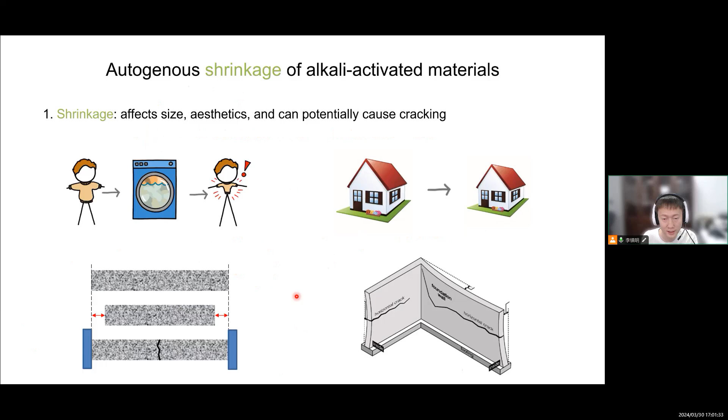Actually these reasons lie in the three keywords of this sentence. First is shrinkage. Shrinkage of concrete can affect the size apparently, it also affects the aesthetics of the structure, and it can also potentially cause cracking of concrete and of the structures. We don't want our structure or our house to become smaller, and we also don't want cracking, which can affect not only mechanical properties but also durability.

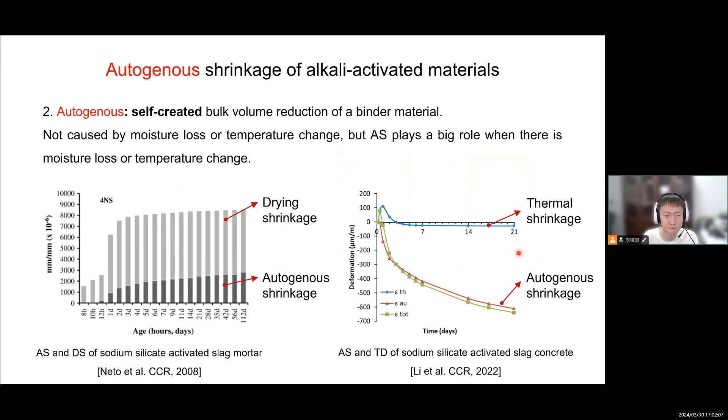Another reason why we should study this topic lies in autogenous, which kind of means a self-created shrinkage. It is not caused by moisture loss or temperature change, but autogenous shrinkage still plays a big role when there is moisture loss or temperature change, for example in drying shrinkage or thermal shrinkage. So autogenous shrinkage accounts for a big part, and that's the reason why we need to clarify this phenomenon first before we can clearly understand drying shrinkage and thermal shrinkage.

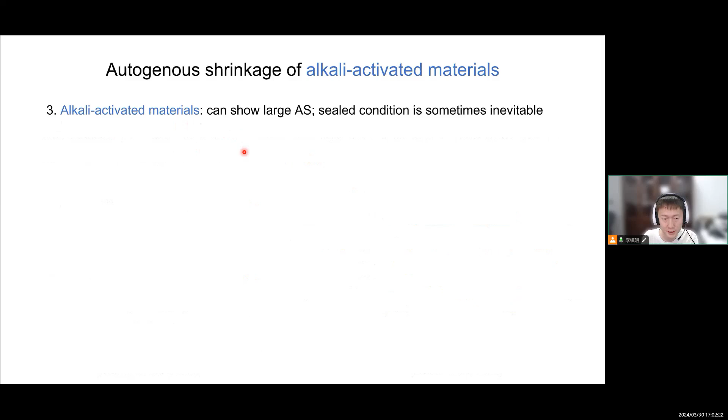The third reason is we need to concern, especially for AAMs, because these kinds of materials are special or different from Portland cement. They can show large autogenous shrinkage, for example. Metakaolin system can show low shrinkage, I will show later, but fly ash system, alkali-activated fly ash, can already show bigger autogenous shrinkage than OPC. Although the later age developing rate is not high, the total magnitude is not low. For alkali-activated slag system, the autogenous shrinkage can be much higher compared to that of Portland cement. So we need to consider this.

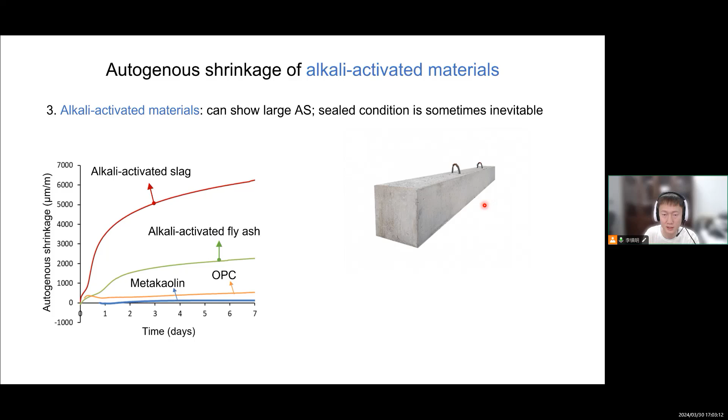It is also because the sealed condition is sometimes inevitable, for example for concrete with a certain thickness. So even though we apply some moisture or even water, for example submerged condition of the sample, the water may not readily penetrate the inside to cure or compensate the self-desiccation everywhere because the concrete is large. And also, even though we put it in submerged condition, it has its own problem.

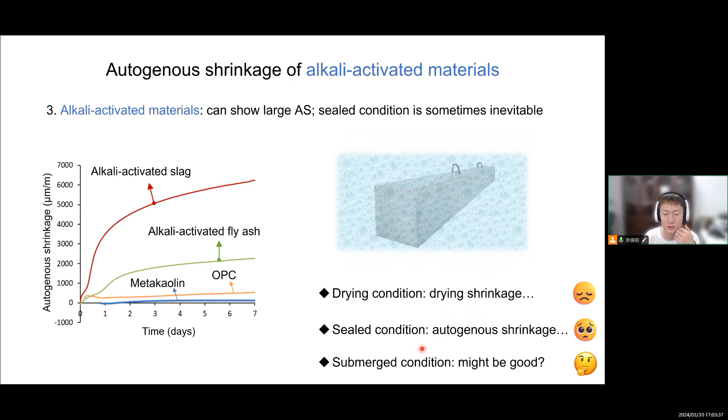So we think, okay, drying condition is not good because there's drying shrinkage. Sealed condition maybe not good because there's autogenous shrinkage again. And then how about we use the submerged condition? Actually, it has its own problem and may not be optimal.

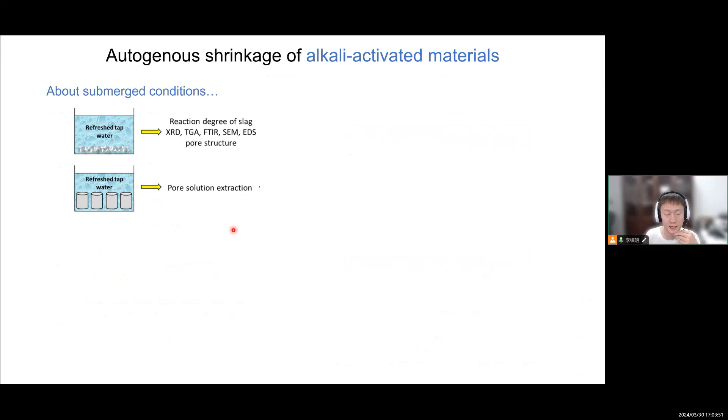For example, as we found by experiments, this kind of work is mainly done by a PhD called Liu Chen, the only PhD I'm supervising now. We found that the compressive strength will be lower if we put the samples, alkali-activated slag samples, into the submerged condition. The reason is leaching of the ions from the pore solution to the environment. So the pH of the pore solution will reduce, and the same happens for all the other elements, sodium, aluminium, silicon, which are key elements to form the reaction products.

But when the sample is in contact with water, these ions tend to leach out from the matrix, which will of course influence the reaction rate, reaction degree, and even induce the decomposition of the gel, which is really not good. We didn't show the flexural strength here, but actually I can say that it is even worse.

The flexural strength can be even lower compared to the one sealed in the sealed condition, and some cracking can even happen due to the leaching. So we cannot just say using water solves all the problems. We still have to face the autogenous shrinkage problem.

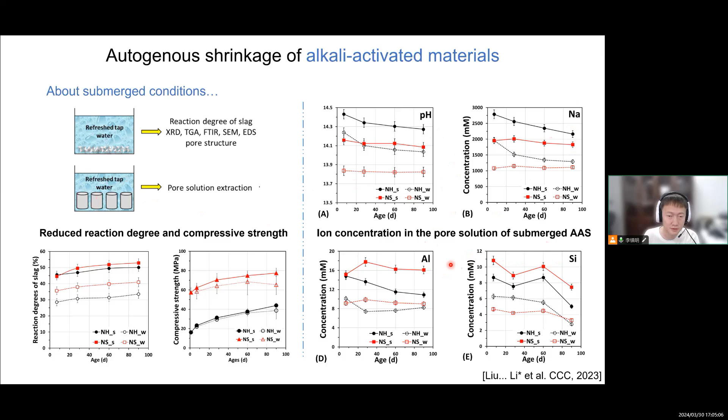Since we have to face this problem, we need to think how to study this topic. I didn't know it in the beginning, but during the past years I eventually formulated a framework to study this kind of topic. First, we need to specify the testing method - should we use the method from Portland cement, and does this method influence the magnitude we get? And when we know the magnitude, we need to explain why, which means mechanisms. Only if we know the mechanisms can we predict the shrinkage value.

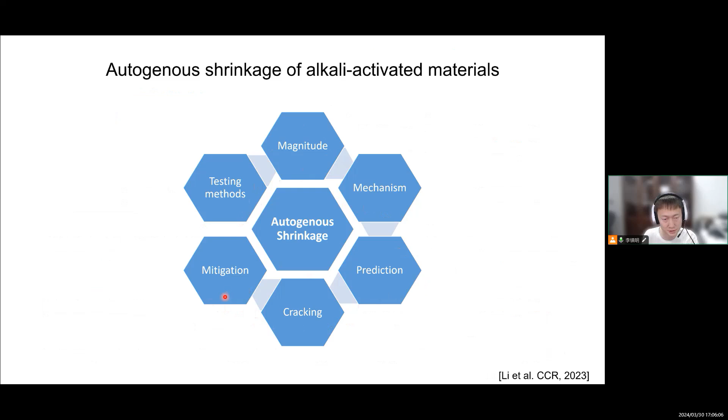Besides the free deformation, we are also concerned about the cracking potential, because we're concerned about the durability issues of the concrete, which is largely related to cracking. And if the samples or materials show large autogenous shrinkage and high cracking propensity, we need to find solutions to mitigate the shrinkage. So that is the whole framework of the research I have done.

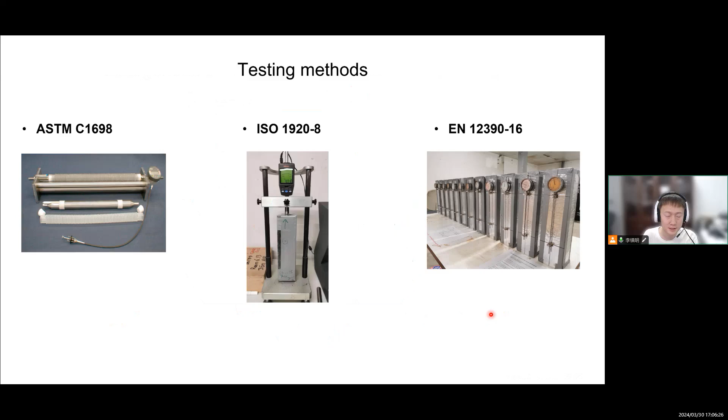So first, about the testing method - basically the methods developed for Portland cement work for alkali-activated materials, which are also kind of binder materials. Except for the alkali-activated metakaolin system, because through experiments I found there is not only chemical shrinkage, but some chemical expansion in the alkali-activated metakaolin system. That's the reason why I propose using the term chemical deformation rather than chemical shrinkage, because there is possibly expansion there. This is intrinsically different from Portland cement.

As we found in the literature, the geopolymerization or alkali activation can be divided into 3 stages, and I correlate these stages with the deformations. In the first stage, it is basically the dissolution of the precursors, and because the volume of the ions after dissolution is smaller than the volume it occupies as a solid part, there will be chemical shrinkage during this dissolution stage. During the formation of alumina-rich gels, which we can clearly see from the NMR results, there will be chemical expansion, meaning the total volume actually increases.

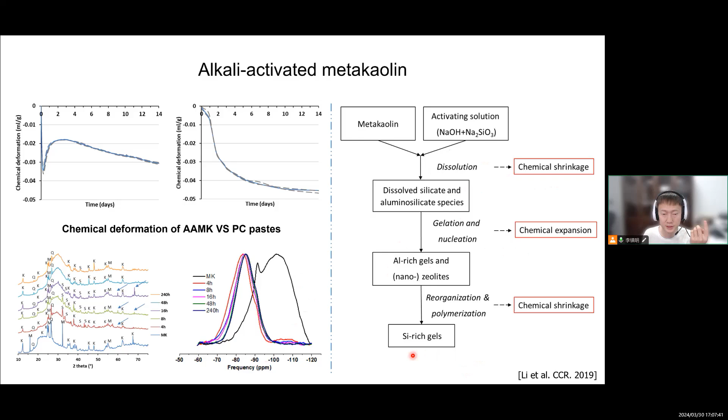This is very interesting. In the third or final stage, when silica-rich gels form, there will be chemical shrinkage again. This expansion is because the formation of crystalline or semi-crystalline phases - the solid tends to occupy a big volume, but this volume is not really available for the accommodation of water molecules. So there is a lot of water expelled from the matrix.

That's the reason why I said this kind of water may influence the measurement, because if we seal everything in a tube but the water is expelled out, maybe it can induce some expansion. But anyway, that is what we get. We can see the autogenous shrinkage curve - actually not autogenous shrinkage anymore, but shrinkage first, then expansion, then shrinkage again. So in the late and long period after the first stage, there will always be shrinkage.

So we are curious whether the shrinkage is because of the same mechanisms as Portland cement, for example self-desiccation. Is that the mechanism? So we use a saturated condition - we didn't really fill the tubes, but just filled 2/3 of the tube to leave a certain space on top. Then I use a syringe to dig a hole, and inject some solutions, for example alkali activator, on top of the surface.

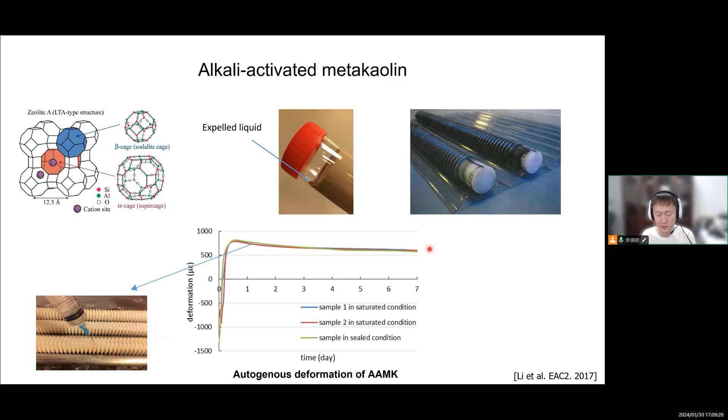I provide enough solution to surround everywhere so that it is in a totally saturated condition. But then we can see the shrinkage happens again. That means self-desiccation is not actually the mechanism behind the shrinkage. The same applies for the alkali-activated fly ash system.

So I test the autogenous shrinkage of this system, but in water, because we need normally an elevated temperature for alkali-activated fly ash - I used 40 degrees. We can see in the beginning there is chemical shrinkage, then a small expansion, or just a trend, and then shrinkage again. So it's also 3 stages of deformation, just the expansion is not that big.

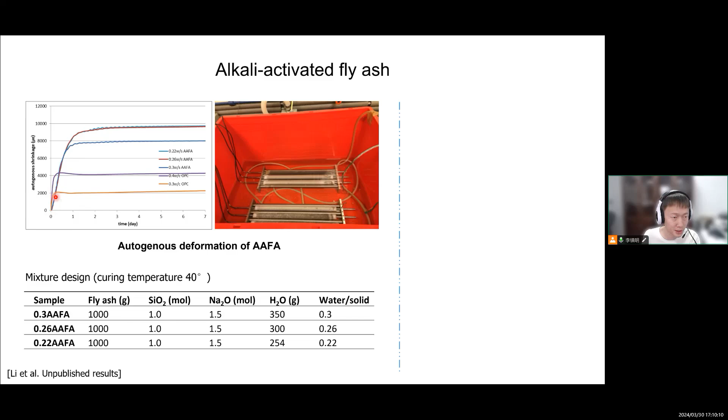People can think that the early age shrinkage - you see several thousand microstrain - can be large, and maybe think the shrinkage is a very big problem, but actually not really. This kind of autogenous or chemical shrinkage in the very beginning is closely related to the hollow voids in the fly ash. During the production of fly ash, the temperature is very high, so there will be very low air density sealed inside the fly ash particles, which are impermeable. So the air is sealed inside with low air density.

During the dissolution, the fly ash particles are dissolved and exposed, so they tend to suck solution back, and then we find chemical shrinkage. But this kind of chemical shrinkage is more a physical issue. It is not due to the reaction that consumes water, but just the water filling some volume of the hollow voids.

Using this simple method, I can experimentally measure how big the hollow voids are. It's actually very considerable, meaning that even though there is early age chemical shrinkage or autogenous shrinkage, it is not an indication of self-desiccation or consumption of water. So we need to focus on later age. The reason the expansion part is not so apparent, just a little bit of trend, is also related to the voids, because they provide space for the formation of reaction products. So the products form there, which means they will not cause expansion of the whole system.

If I'm allowed to say a bit more about this, I'm also thinking that this kind of hollow spheres can be used for internal curing. For example, if we pre-store some liquid inside, then later, during the dissolution and after exposure, the liquid can join the reaction and compensate the self-desiccation.

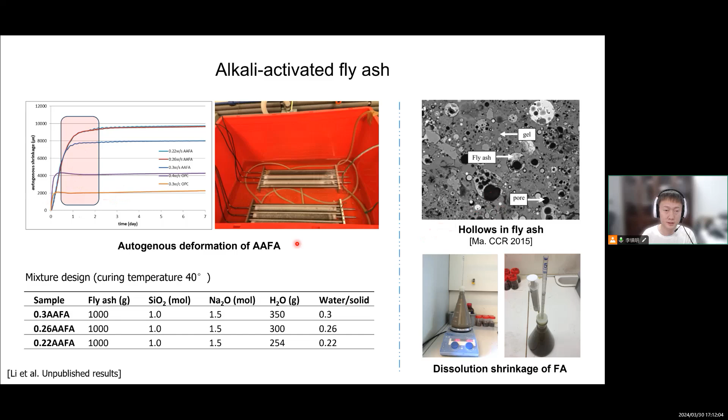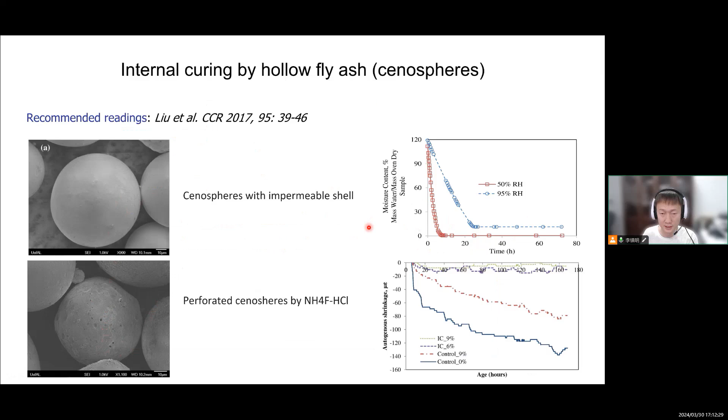But then I found someone already studied this, for example, by Liu. He used some acid to pre-dissolve the fly ash. You can see some holes there, and then some solution is sucked inside, and then after mixing, in the hardened paste, this kind of sphere has the potential to provide internal curing. Because this expert has already studied this, I didn't go into detail, so just recommended readings here.

So anyway, I want to say that even though there is chemical shrinkage of alkali-activated fly ash, and also for alkali-activated metakaolin, the relative humidity inside the system didn't really decrease. It actually even increased because of the consumption of ions. As we know, the relative humidity of salt solution is lower than water, so when the ions are consumed, the relative humidity can increase. And because there is no self-desiccation, the relative humidity can be even closer to 100%.

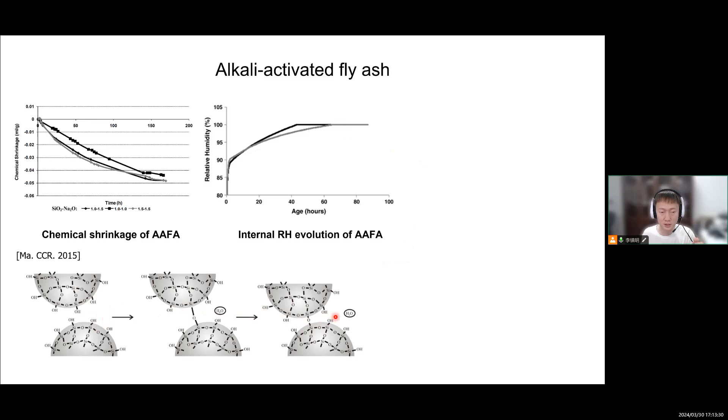So which means the shrinkage is not caused by the same mechanism as in Portland cement. Then what is the mechanism? We hypothesize maybe it's due to syneresis. Syneresis means the water hydrolyzed first and is used by the reaction, but then during or after the polymerization, the water returns to water molecules, which means the water is not really consumed by the reactions. So the self-desiccation shrinkage may not really exist in low calcium AAMs.

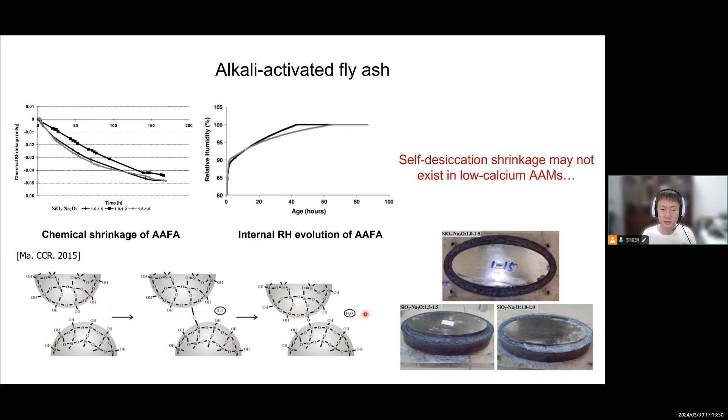Consider this, and also the low cracking potential caused by a sealed condition - this is experimental work done by Dr. Yufei Ma. Because of this, I didn't really go further, because I think autogenous shrinkage is not really a big problem for these low calcium AAMs.

Then I spent more time on alkali-activated slag. The testing methods are basically fine, and then I went to the magnitude part. We can see that there are a lot of parameters that influence the magnitude of autogenous shrinkage of AAS. Basically, if we use a lot of alkalis, there will be higher autogenous shrinkage.

But for the modulus, it's not the higher the larger shrinkage, but somewhere around 1.5. If we use a modulus of activator, which means silicate to sodium ratio, of 1.0, the autogenous shrinkage is the largest. And for the water to binder ratio, the trend is the same as for Portland cement - if we use a lower water to cement ratio, there will be larger shrinkage because there will be less water available and also a very dense pore structure.

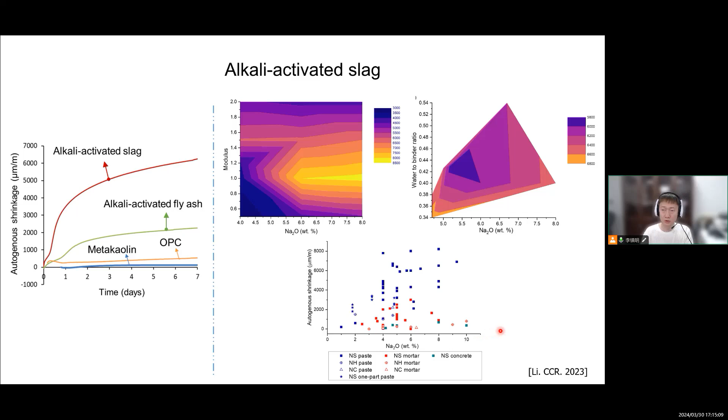Another parameter is the presence of aggregates. Compared to paste, mortar and concrete will show lower autogenous shrinkage. People will think that, of course, there will be aggregates, so you have less material to shrink, and of course the shrinkage will become smaller, but I want to emphasize that actually that is not true. The reason for the lower shrinkage of concrete is not just a dilution effect.

For example, if we consider two systems - one is the pure paste, the other is paste but with a part of the paste taken out instead, as hollows - we can see that there will be less paste there, but the shrinkage of these two systems is actually similar, if we do not consider the local geometry. So the reason aggregate can restrain the shrinkage is because aggregate is stiffer than cement, and it doesn't shrink itself, so it can restrain the shrinkage. It's not just because there is less cement or less paste to shrink.

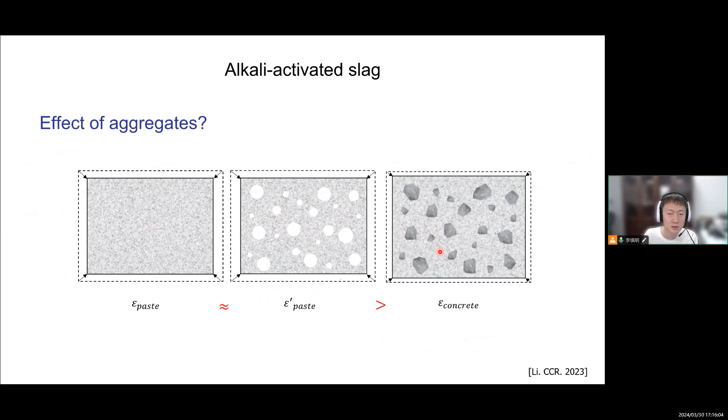And then we explored the mechanism of the large shrinkage of AAS or slag and fly ash blended systems. The first thing is the same as Portland cement, which is self-desiccation. We measured the internal relative humidity, which actually decreased a lot. Why it decreased so much is because the pore structure is normally denser than Portland cement—you can nearly see no capillary pores here, very dense.

As we know, if we put tubes in water, the thinner the tube, the higher the water level will go, which means a higher capillary pressure. So the capillary pressure is higher.

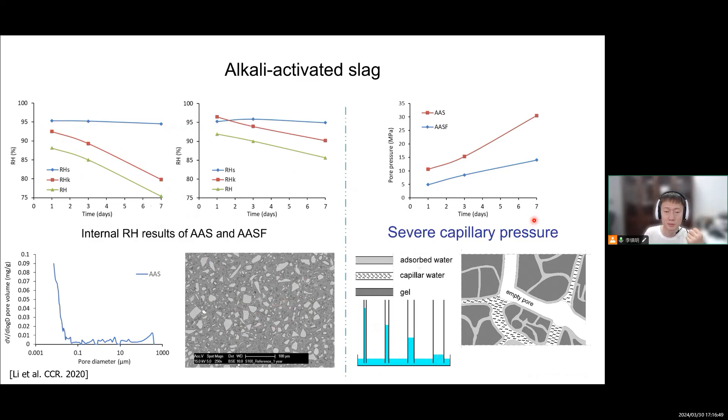But besides this, there are other mechanisms. If we put Portland cement in saturated condition, there will be expansion because of the formation of ettringite, meaning the only reason for shrinkage of Portland cement is capillary pressure. But if we put AAS in saturated condition, there will still be a large part of shrinkage, especially at early age, which means self-desiccation is not the only mechanism here.

We then correlate the autogenous shrinkage at very early age with the heat flow, which indicates the reaction rate, and we can see they correspond very well. During the dormant period, there is a small autogenous shrinkage developing; during the acceleration period, the shrinkage increases very fast; and during deceleration, the rate becomes more stable.

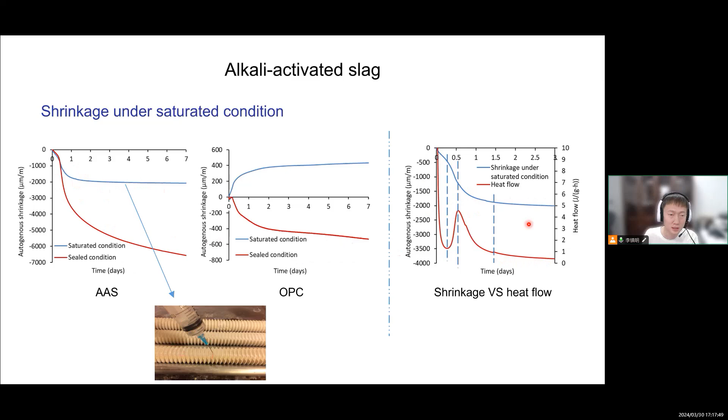So we hypothesize the reason is not just the reaction rate, but the consumption of ions. According to the study by Yibing Zuo, we can see the ion concentration from the beginning till the first day decreased really a lot because the reaction consumes ions.

In very fine pore structures, these ions exist surrounded by water shells, which means that if there are a lot of ions, they will have a repulsive steric hydration force with each other, balancing compressive stresses like van der Waals force or capillary pressure, which tend to make the gel shrink. This repulsive force is in balance with those.

But during the reactions, these ions are largely consumed, meaning there will be less hydration shells, so the steric hydration force becomes smaller. The repulsive force becomes smaller, but the compressive or attractive force is still there, so the gel actually becomes closer together.

That is my hypothesis, but I didn't really get molecular level evidence yet. It's just a hypothesis.

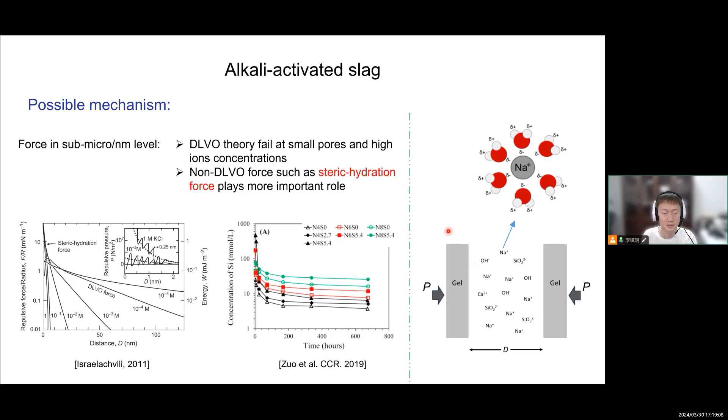So in summary, what are the mechanisms of autogenous shrinkage of AAS? First is the big capillary pressure caused by self-desiccation. Second is the reduction of steric hydration force due to the consumption of ions. The third reason is the low elastic modulus.

Alkali-activated slag or slag-fly ash blended systems are not as hard or stiff compared to Portland cement—the elastic modulus is normally lower. Another reason is they show very pronounced deformability, which is time-dependent behavior we call creep.

So when there is a constant pressure, even if the capillary pressure doesn't increase anymore with time, the constant pressure can still cause the gel to shrink because of creep. These effects are actually even larger than what we observe in Portland cement.

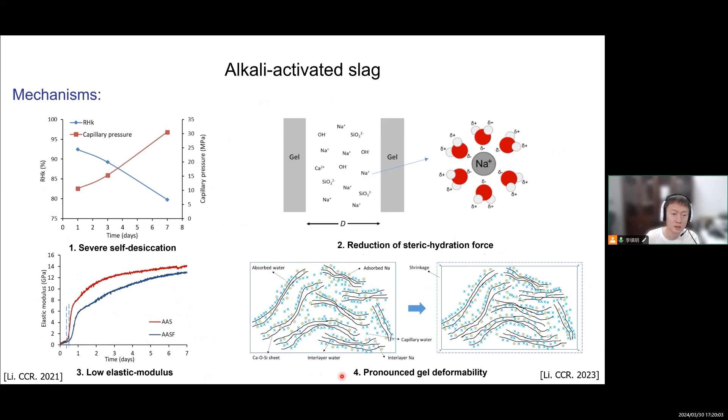So here I would like to propose something. When we look at shrinkage mechanisms, we should not focus on the terms or names of the materials. For example, fly ash and slag are both byproducts, but they have totally different shrinkage mechanisms because they have different chemical composition—one is silica rich, one is not.

One is calcium rich and one is not. We also call these geopolymers or alkali-activated materials, but actually the names aren't so important. For example, in Portland cement, the pozzolanic reaction is caused by CH, which is also alkali—so why isn't that alkali activation? Actually, the name doesn't matter.

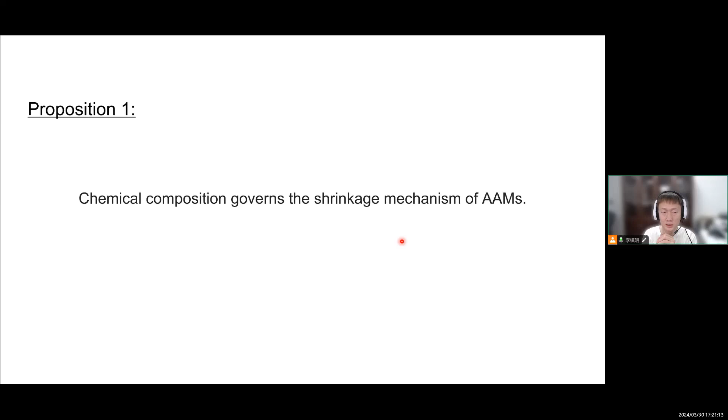Actually, AAS is more similar to Portland cement than to fly ash or metakaolin systems. Fly ash is a waste, but metakaolin is a resource, yet these two systems are more similar to each other, while AAS and Portland cement are more similar. So we should look at the chemical composition—that is what I want to say here.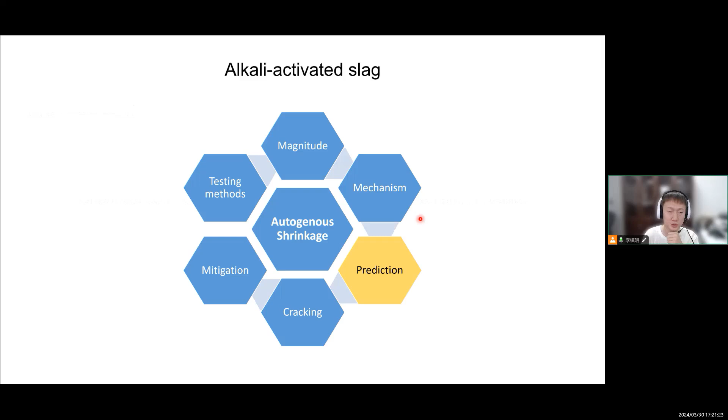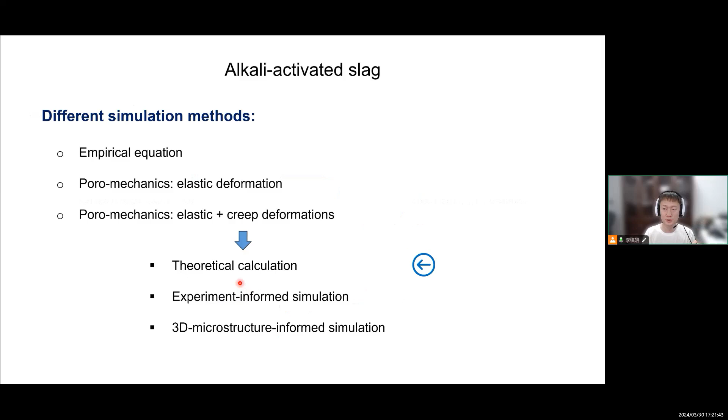Since we know the mechanisms already, we should be able to predict the shrinkage. There are a lot of types of models available, but because we do not have a 3D microstructure-informed model to predict shrinkage of alkali-activated materials yet, I used a method that is half theoretical and half experimental, with even some empirical parameters.

So I divided the shrinkage into two parts. As we found, part of the shrinkage is caused by the pore pressure or capillary pressure, but another part is the steric hydration force part.

So I divided it into two parts. For the capillary part, there is an elastic shrinkage and also time-dependent shrinkage, which we call creep. For the elastic part, it's simple - we just use Hooke's law and calculate or measure the different parameters.

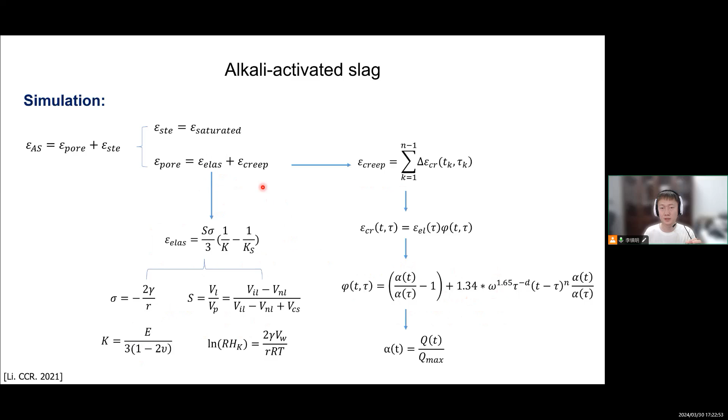But for the creep part, we need to use some equations involving reaction degree, water to cement ratio or liquid to cement ratio, which are omega parameters. There are some empirical numbers like 1.34, 1.65, etc. These are from a paper written by Professor Klaas van Breugel, who is my PhD supervisor, and we discussed this together. I used his model to predict the creep of the alkali-activated slag because I think if they are physically similar, then this model should work.

So this is the simulation results. We can see that indeed it matches really well with the experimental data. There are three parts: steric hydration force, elastic part, and creep part - actually a very big creep part. This means our understanding of the mechanism should be right.

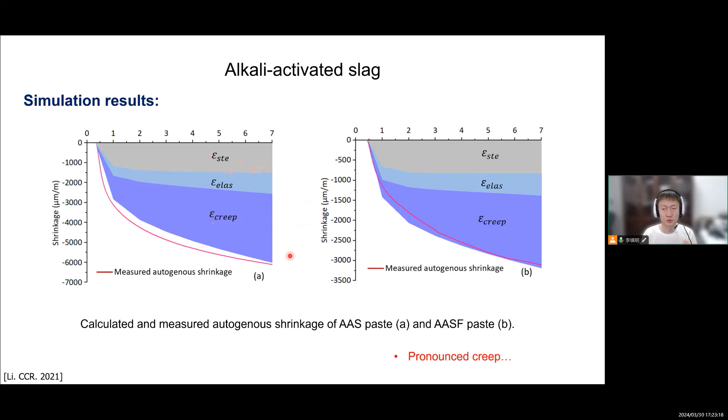So as a famous professor said, all models are wrong. Actually these models are also not right. People can think, okay, you already said that AAS have different mechanisms from Portland cement, then why do you use the same parameters? Why is it 1.34, not 1.35 or something?

So first, I didn't use the model to predict the whole shrinkage. I divided it into several parts, and I only used it to predict the creep. Second, I used the same model and didn't propose new numbers, because if I propose totally new equations and numbers, I will surely be suspected of making up things just to fit the experimental data. Then it will lose the whole meaning of our work.

So all models are wrong, but some are useful. This model we used is useful because it tells us that creep is a very important part of the autogenous shrinkage for the AAS system. Since we know this, we should be able to use this model to predict the shrinkage of alkali slag concrete.

So for the prediction of shrinkage of concrete, there are already several models available, for example the fib Model Code. In the standard, we can use the model to predict shrinkage from strength data, but this model doesn't work for AAS because for similar strength level, AAS shows higher autogenous shrinkage. So this kind of equation doesn't work for this material - it will really underestimate it.

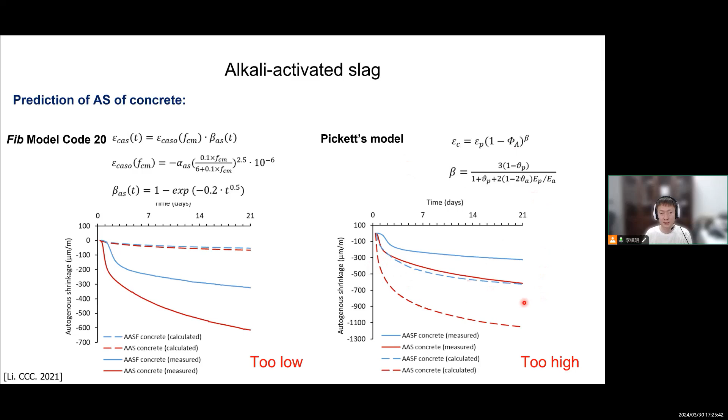So we consider this creep part in the equations, and we integrate the creep part into the equations. We calculate the force between aggregates and the paste. But there is, of course, a limitation - we assume the paste is very large and the aggregates do not really interfere with each other. But we agree that in reality, the distance between aggregates is actually not that large - it's actually small, so aggregates will influence each other.

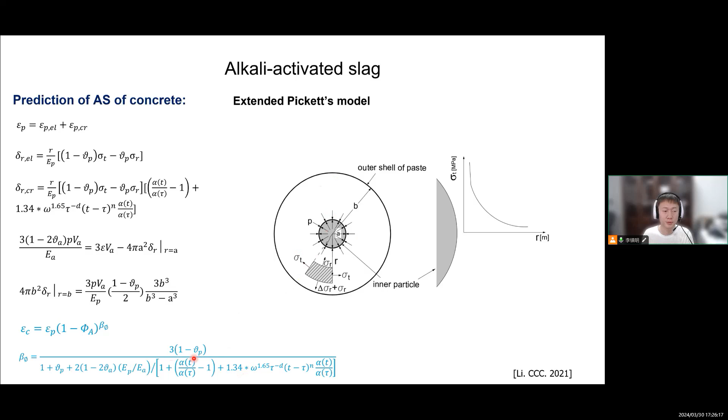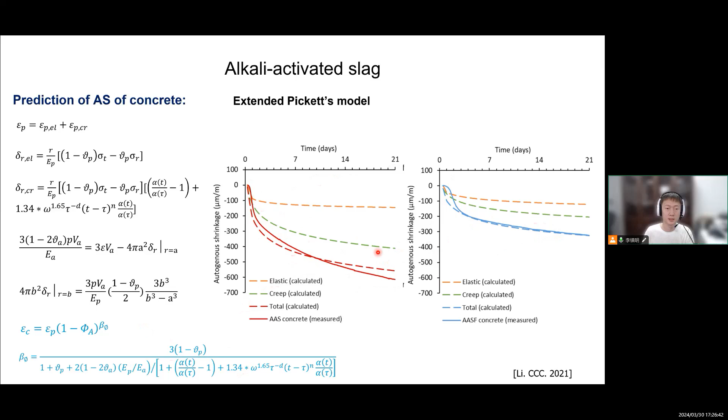So this is just the initial model. We assume the paste is very large, then we integrate the creep part into the model, and calculate the shrinkage of concrete based on the shrinkage of paste. But the result is actually very nice, except for the very early age when the reaction is very fast and very complicated - we cannot really predict everything. But after the first days, they really match well with each other, showing that the methodology we used should be reasonable, should be fine.

And since we can predict the free shrinkage, we are also curious about cracking when the samples or the material is in a restrained condition. For example, there is old concrete, there are adjacent structures - nothing in our house is actually free, everything is connected with each other. So there can be tensile stress and cracking potential, so we need to study that.

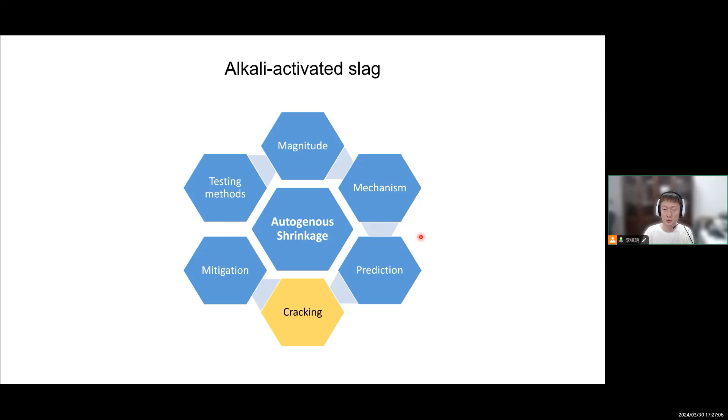I studied the concrete for cracking potential using this TSTM and also ring test to restrain the concrete, and then observe the cracking at the macro scale and also the micro scale. Basically, the methodology is: we know the free shrinkage and then we know the elastic modulus.

We should be able to calculate the tensile stress, but of course we consider the relaxation. So when we have tensile stress, we compare it with tensile strength, we can predict the cracking potential. That is the whole methodology.

We compared the cracking time of alkali-activated concrete with CEM I, CEM III/A, CEM III/B, which means it incorporates a large volume of fly ash or slag. The cracking time is not necessarily earlier. Actually, the cracking happened later, thanks to the relaxation.

So although the tensile strength for alkali-activated concrete is lower. For Portland cement concrete, we know that it's around 0.1, so when you have a compressive strength of 10 megapascal, the tensile strength should be around 1. But for alkali-activated concrete, it's lower, 0.05. So it is not so good for the cracking because the tensile strength is lower.

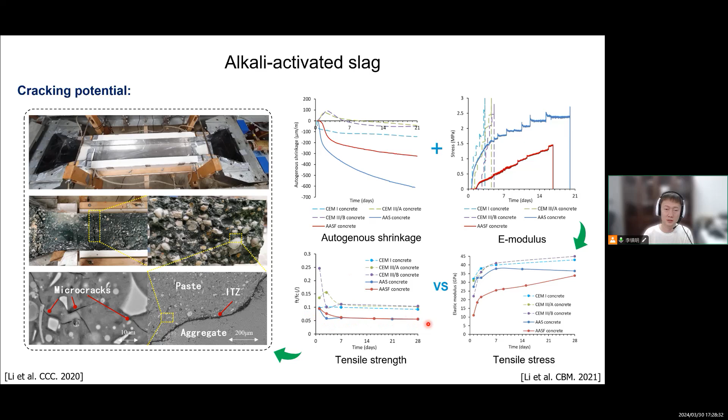But thanks to the relaxation, the cracking time is not so early. The relaxation, we simulated it from the creep coefficient, so we based on the creep coefficient to calculate the relaxation coefficient. And we consider the shrinkage into two parts, elastic and creep, as we said. And then we consider the relaxation. Eventually the prediction is not that bad - we can more or less simulate the stress evolution in restrained concrete.

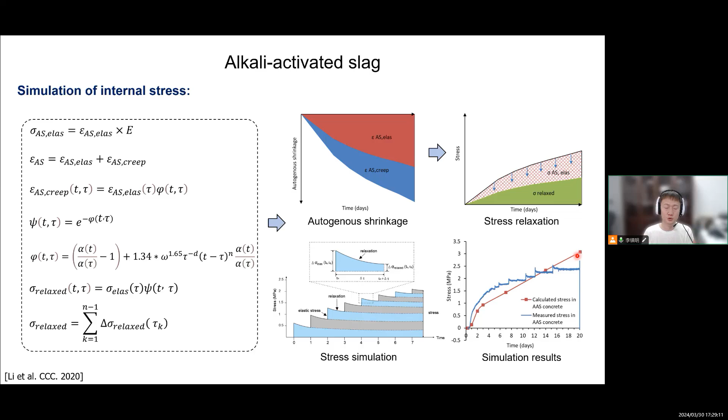And if we know the flexural or tensile strength, we can compare stress with strength, then we should be able to roughly predict the cracking time, which is really useful for structural analysis.

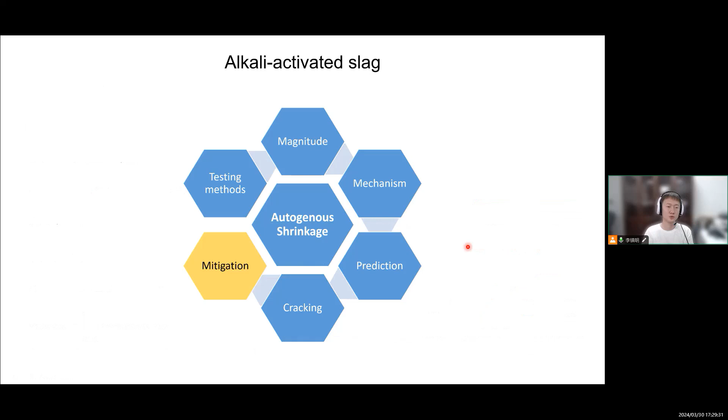Since we know that there is a large shrinkage and also the cracking still occurred, although it is not so early, in 2 or 3 days, it still occurred within 3 weeks, which also means very high cracking proneness. Then we need to find some solutions to mitigate the shrinkage and the cracking proneness, of course.

There are different ways to mitigate the shrinkage, but I want to say that all the methods must have their own mechanism. So we need to see which method changes which parameter - it's related to the elastic modulus to make it stronger, or related to a lower capillary pressure, or lower saturation degree, or a coarsened pore structure, which means a larger pore size, or something else. So anything must have its own mechanism.

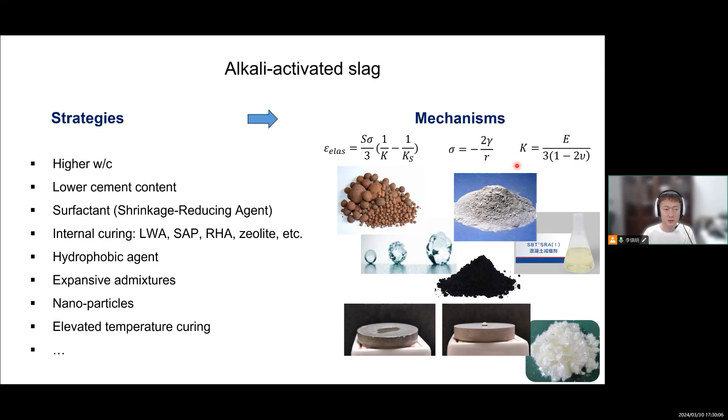So I basically considered 2 methods. One is internal curing by superabsorbent polymers, which are actually not new - they've already been used in Portland cement for a long time, so I just used it. I didn't propose it, but we can see that it worked.

It reduced the shrinkage by more than half, basically in the later age. In the early age, the SAP cannot really eliminate the shrinkage, which is quite reasonable because we already said self-desiccation is not the only mechanism. So however big amount of SAP I use, even more than needed, the shrinkage is still there, especially in the early age. So we cannot fully mitigate the shrinkage, but it worked really well in the later age.

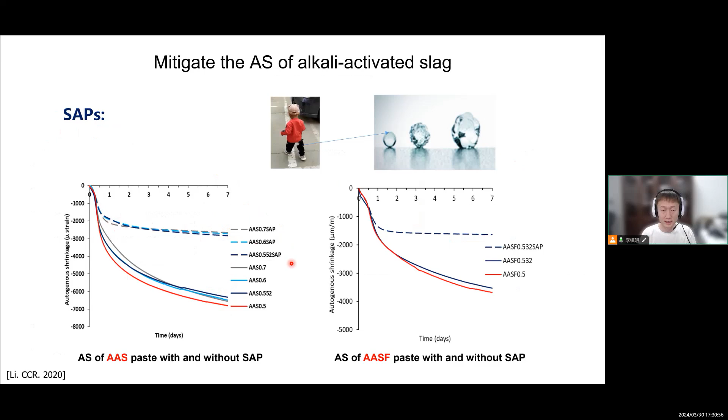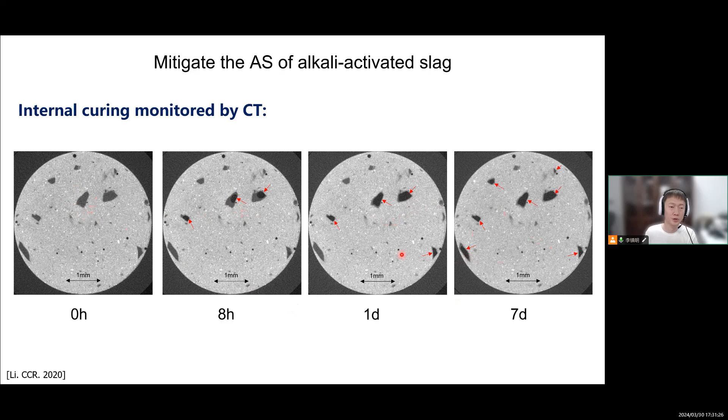Another way we tried to monitor this internal curing is by CT scan. We can see in the beginning it is kind of gray, which indicates the liquid in the SAP, and then it tends to become black because the water, all the liquid, is released, and then there are air bubbles. With the elapse of time, more black areas appear inside, which clearly shows how the liquid is going from inside the SAP to outside.

Another way to mitigate the shrinkage is by adding metakaolin. So my initial idea is: alkali-activated metakaolin can show chemical expansion, and alkali-activated slag can show large shrinkage, and AAMK can release water, expel water, and AAS needs water. Then maybe the water can compensate each other, can internally cure each other.

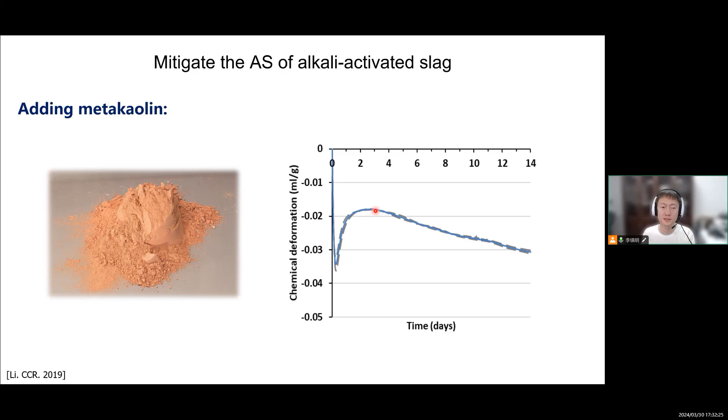That is my initial idea, but then this idea failed, because from the chemical point of view, when you mix metakaolin together with slag, they will not be 2 separate systems anymore. They are actually a blended, mixed system, and the reaction products will not be N-A-S-H gel here and C-A-S-H gel there, internally curing each other - they actually become a blended gel, and it will not have 2 separate systems anymore. But the results are not bad.

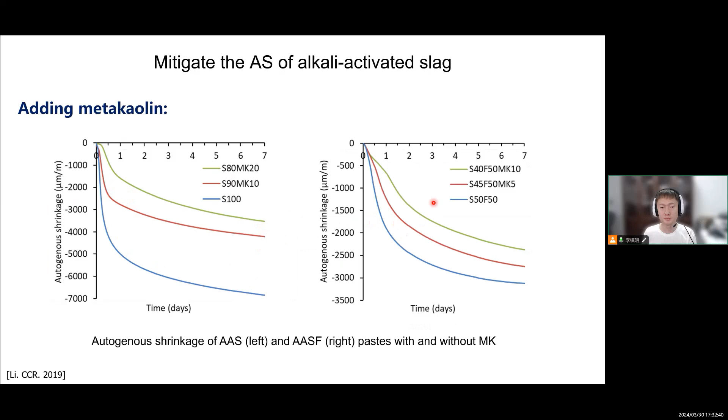So that idea didn't pan out, but the shrinkage is still reduced a lot, especially in the very early age. You can see from the blue to the green it's reduced more than half in the very early age. But the reason is not what I thought, the internal curing - no, it is because of something else.

So through a lot of characterization methods, we clarified the mechanism. Actually, it is because the addition of metakaolin provides a lot of additional silicate and alumina, which influences the reaction products, reaction rate, pore solution, and pore structure.

So for example, the reaction rate is reduced a lot. Actually, this phenomenon is very similar to a higher modulus of activator. If you use more silicate in your activator, you will find a similar phenomenon. So the reaction rate is reduced, and the pore structure is coarsened, meaning lower capillary pressure when you have metakaolin. And from the pore solution analysis, we can see there is indeed more silicate and more alumina there.

And the early age chemical shrinkage is actually increased because the metakaolin is very reactive itself, so it dissolves even faster than the slag. It contributes to a large initial chemical shrinkage due to the dissolution. But at later age, because of the reduced reaction rate, the total chemical shrinkage becomes lower, meaning less water consumption and less self-desiccation. But the strength is still similar, which is good news, because it can reduce the shrinkage but maintain the strength.

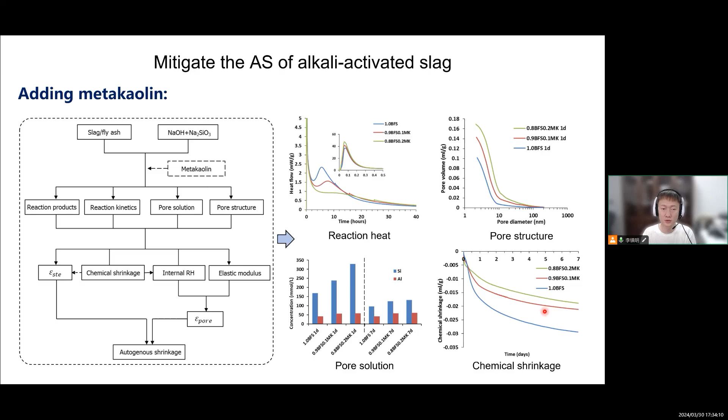Although the mechanism is not what I thought in the beginning, it still worked. So I thought, okay, internal curing can be very effective for the later age shrinkage, and metakaolin is really useful for the early age. If I combine these two, the ICM, meaning internal curing and metakaolin, maybe it can reduce the shrinkage in the whole period. Actually, that comes true.

So we can see that compared with the reference concrete, if we combine internal curing and metakaolin, the shrinkage is reduced more than 80% over the whole period. And then the cracking potential is also reduced a lot. If we do not apply this method, it cracks within 3 weeks, as we already mentioned. But if we apply this tool, the cracking didn't happen within 3 months. The stress is lower than 0.5, so it will never crack, I think.

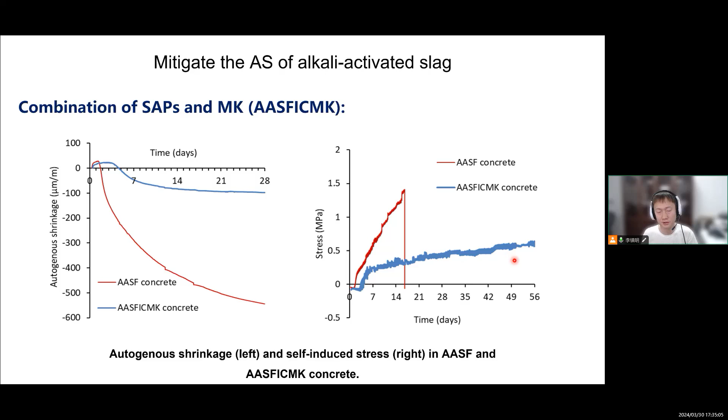So it's really helpful. The concrete strength is lower, of course, because you have SAP and metakaolin which influence the reaction, but the strength is not that low. It's still more than 50 megapascal, which is already sufficient for a lot of applications. The splitting strength is also not low, 3 megapascal. And the workability is also very good. So we think these strategies are very promising to be used in concrete structures.

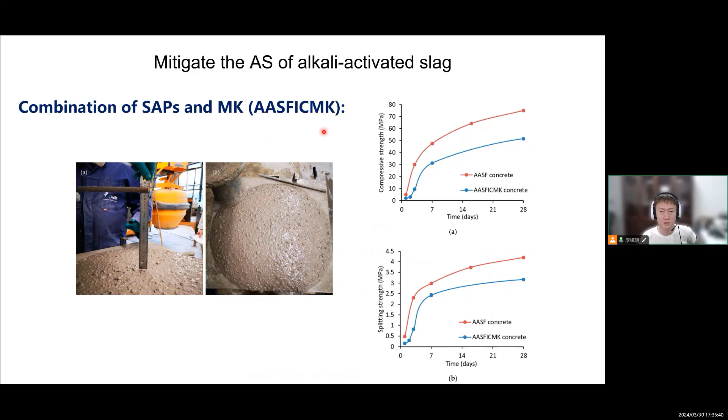So why I always focus on concrete structures is because I think civil engineering is a very serious discipline. Material science is very fantastic, but civil engineering is very serious. And we always talk about sustainability. We can use low carbon raw materials, of course, AAMs or LC3 or other byproducts. But if the performance is not good, if the service life is not long enough, for example just half of the traditional Portland cement concrete or UHPC, then we need to demolish, we need to use new material, we need to build new structures again, which means surely more CO2 emission.

So I want to say that we need to consider the carbon issues from the whole service life point of view, not just by using low carbon raw materials, but we need to consider that the performance should be good. We hope the shrinkage to be low, and we hope the cracking proneness to be low too.

My story is nearly ending here, but I have to say this is just a very tiny part of the whole literature. Especially the topic of autogenous shrinkage of AAM, but I personally focused more on alkali-activated slag. But we are trying to be more representative of all alkali-activated materials. How did we do that?

Actually, it's in the RILEM TC 294 MPA, chapter 10 of the whole state-of-the-art report. We were able to gather a lot of experts in this field. We formed a very strong team, and we've been very fully committed in the writing. We read a lot of literature, and we put together a very nice draft. There are a lot of new things, at least to me, so I'm learning during this editing, and I think we did really good work.

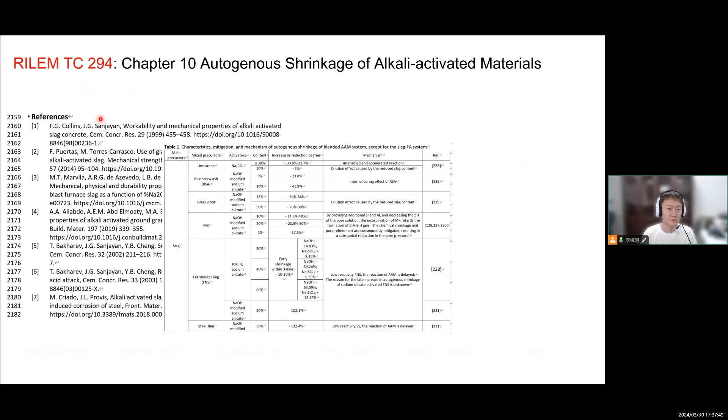As you can see, currently the main text is more than 2,000 lines already. We provide a very good summary table and also a lot of good-looking figures. So this part of the chapter hasn't been published yet, but I hope we can look forward to that.